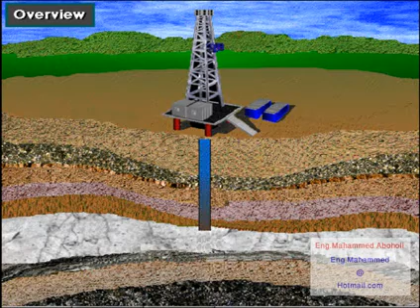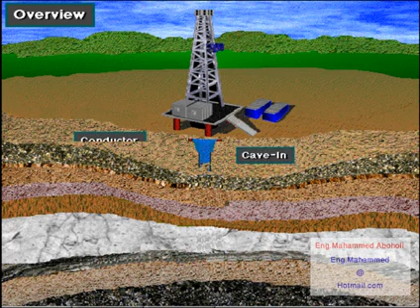Almost always, the drilling contractor cannot begin drilling at the surface and go all the way to total depth in one step. For one thing, formations near the surface tend to crumble and cave in easily, so conductor casing prevents cave-ins. For another thing, formations near the surface may also hold fresh water that the well cannot contaminate.

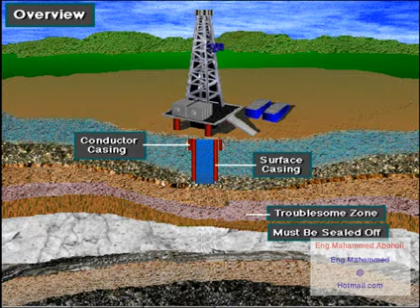So surface casing protects freshwater zones. For still another thing, deep formations are sometimes so-called troublesome formations. That is, they can be drilled by adjusting the properties of the drilling mud, but once drilled, need to be sealed off to prevent problems in drilling the deeper portions of the well. So intermediate casing seals off troublesome zones.

Sometimes deep wells require more than one intermediate casing string. Finally, once the producing zone is drilled, it needs to be protected and sealed, so production casing isolates the producing zone. The first string of casing is the conductor casing.

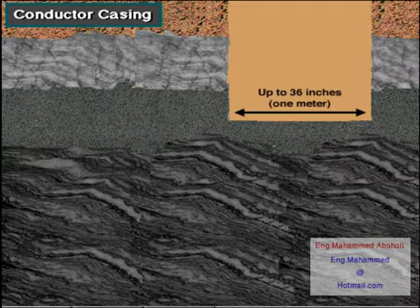The hole drilled for it is pretty big, often as much as 36 inches or more, almost a meter in diameter. The conductor hole has to start out pretty big because as drilling goes on, the hole's diameter decreases. In some cases, the rig will hammer the conductor casing in place if the ground near the surface is really soft. If the conductor hole is drilled, the casing is cemented in it.

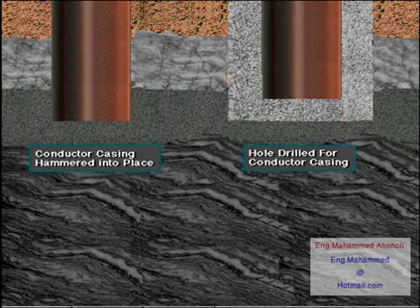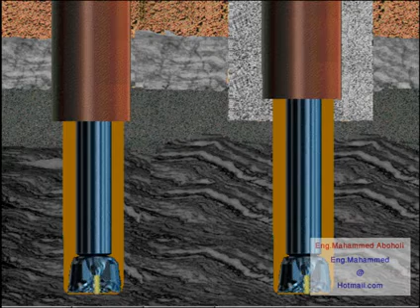Using a bit whose diameter is small enough to easily go inside the conductor casing, the rig drills the hole below the conductor to a prescribed depth. The diameter of the surface hole can still be relatively large, say 17 inches, over 400 millimeters or even more.

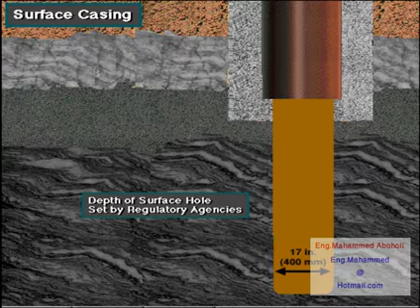The surface hole's depth is usually set by regulatory agencies. They require that the surface hole be drilled through all freshwater zones, and that surface casing be set and cemented to protect the zones from damage by additional drilling operations. This depth could be from hundreds to thousands of feet or meters.

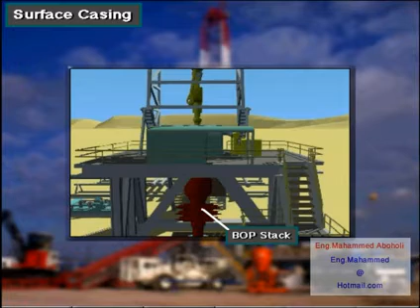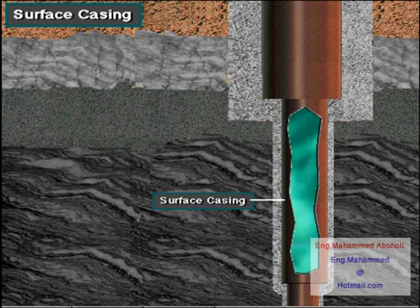Normally, crew members nipple up, or connect, the BOPs to the surface casing at the wellhead. So this casing must be strong enough to support the BOP stack. In addition, it has to withstand the gas or fluid pressures the well may encounter. Surface casing also has to be strong enough to support the additional casing strings hung inside of it.

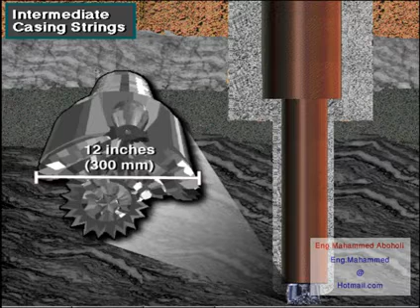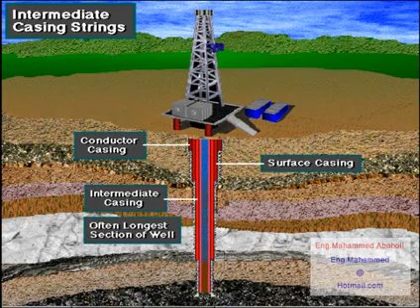To drill the intermediate hole, the operator chooses a still smaller diameter bit, which easily fits inside the surface casing. A bit of about 12 inches, or 300 millimeters in diameter, is one example of the size. Intermediate casing is also cemented into place to seal off troublesome formations, like lost circulation zones or abnormally pressured zones. It is often the longest section of casing in the well.

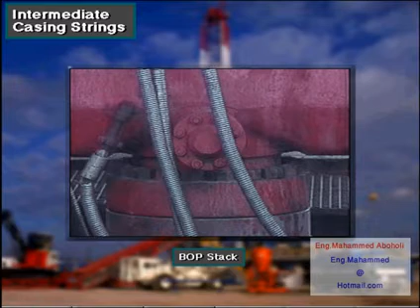Also, the crew connects or nipples up the BOPs to the top of the intermediate casing by using an adapter and casing head, or a drilling spool, which is stacked on or connected to the top of the surface casing wellhead. It therefore anchors the BOPs for the drilling that comes later. Remember that the crew has to nipple up a stack of BOPs to each string of casing that is run into the well. First they nipple up on the surface casing, then on the intermediate casing, and finally on the production casing.

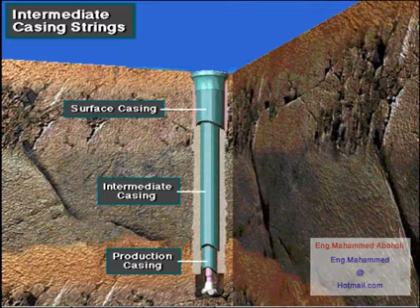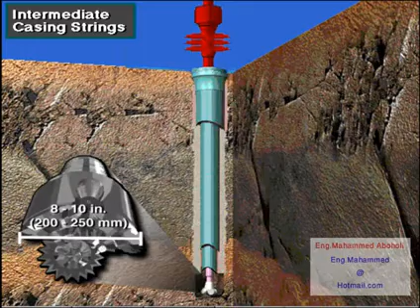To drill to final depth below the intermediate casing, the rig owner selects a bit whose diameter is small enough to fit inside the intermediate casing, say from 8 to 10 inches, or 200 to 250 millimeters. This part of the hole penetrates the producing zone.

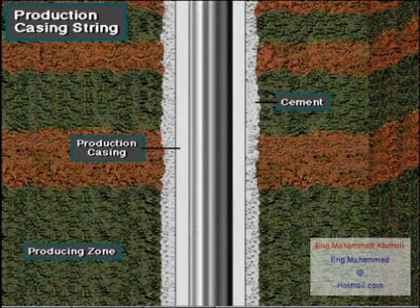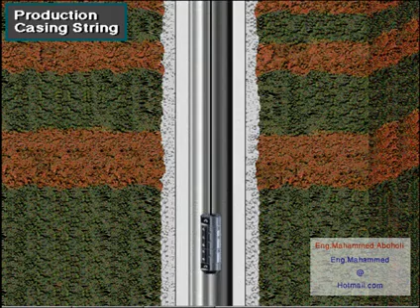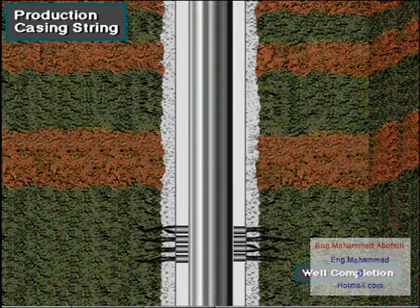When cemented in place, production casing seals off the producing zone and readies it for production. Production casing also houses and protects the tubing and other equipment used to produce the well. The operator usually perforates, puts holes in this casing, when the well is completed or ready for work to begin. Well completion is the term describing the activities and methods of preparing the well for production of oil and gas. Oil and gas flow into the well through the perforations.

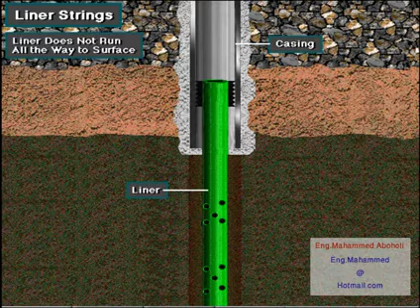Sometimes well owners run liners instead of casing into the well. A liner is a shortened string of casing used to case the smaller open hole section below an existing casing string in the hole. It's just like casing, except that a liner does not run all the way to the surface. Instead, the casing crew hangs it from the bottom of a previously run casing or liner string using a special piece of equipment called a liner hanger.